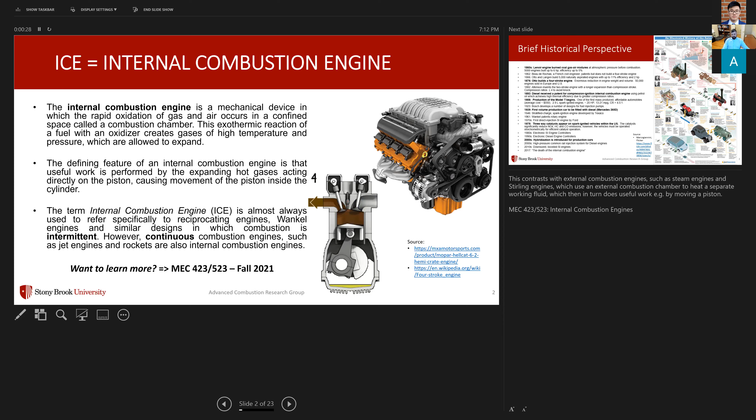But before we banish it, just like we did with the dinosaurs, let's take a little travel down memory lane and look at a brief historical perspective of the internal combustion engine.

First engines came around 1860 or so. In the 60s, Lenoir developed an engine that burned coal gas-air mixtures - couldn't be any dirtier than that. But it was one of the first running engines. It displaced horse-drawn carriages. Thankfully, only about 5,000 of these engines were built. To give you an idea, these were about 6 horsepower and had a thermal efficiency of like 5%.

Contextually speaking, that 5% thermal efficiency number has gone an order of magnitude higher, and we're sitting at probably around 50% efficiency in the internal combustion engine itself.

A little after the 60s, in 1876, Otto builds the first 4-stroke engine. That's the animation you saw on the previous slide. It's the type of engine that is in most vehicles today, if not all. So a big revelation change there.

Then in 1893, Rudolf Diesel received his patent on the compression ignition internal combustion engine, which was a different variant of Sir Otto's engine. The Otto engine becomes essentially what burns gasoline today and is spark ignited, and Rudolf Diesel's engine becomes essentially what we know today as a compression ignition or diesel engine.

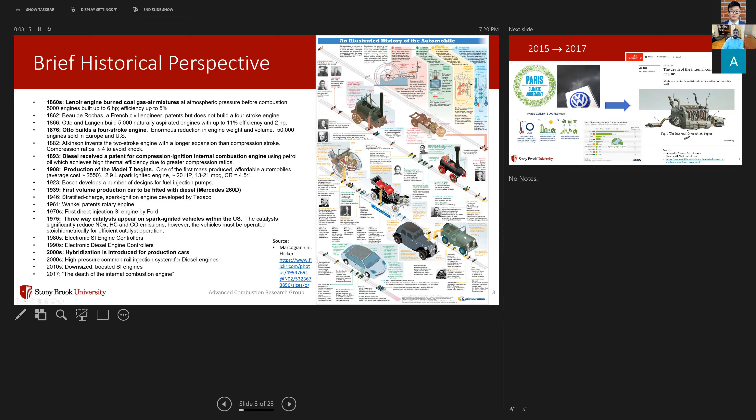Then in 2017, a very salacious article comes out by The Economist titled 'The Death of the Internal Combustion Engine.' So how did we get here? How did we go from the 1860s, when the first engine came about, and even 1975, when we had our wake-up call that smog existed, pushing to have better and better fuel economy, to the point that The Economist is writing an article about the death of the internal combustion engine? How bad of a job did we do as internal combustion engineers at the end of the day? That's how I view this problem.

There are a few contributing factors. You might have heard of Dieselgate, which happened in 2015. Volkswagen, which sells nearly the most vehicles in the world as a company, actively skirted emissions regulations to sell a diesel vehicle that got better fuel economy than the rest, was cheaper, and didn't require maintenance. So you'd walk into a dealer and your choice was either, say, an Audi A4 or a BMW 3 Series, the two competing sedans in that category, both of European descent. The BMW variant was more expensive—a few thousand dollars more—because it had to cover the cost of diesel emission fluid, which is urea.

And so one of the after treatment devices needs this. It also required you, just like windshield washer fluid, to fill this diesel emission fluid every so many thousands of miles, right? Quite an inconvenience for a driver. And on top of all that, you got worse fuel economy than the Audi variant. And the BMW was even heavier, just the boot for the whole thing. And of course, slower.

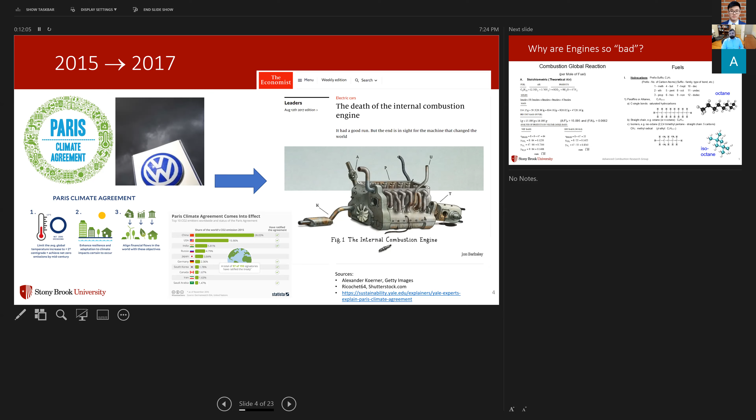Okay, so why are internal combustion engines so bad? Internal combustion engines, I'm going to take you back to your high school.

All right. So why are engines so bad, quote unquote? Let's go back to our high school chemistry, right? And if you have done stoichiometry, which everyone has, balanced one of these reactions, usually we have a fuel plus an air, right? And we have a reaction that proceeds in one direction. We make products of combustion.

And if you have the appropriate amount of air, made up of, this is simulated air, of oxygen and nitrogen in the proper proportions, you see that the fuel, a hydrocarbon fuel, exothermically reacts with air and creates CO2 as a product, water, and nitrogen. The nitrogen is not so bad, because there's a whole lot of nitrogen in the air. The water, again, that's also not very bad, but the CO2 is really what's causing the problem that the Paris Climate Agreement is trying to address.

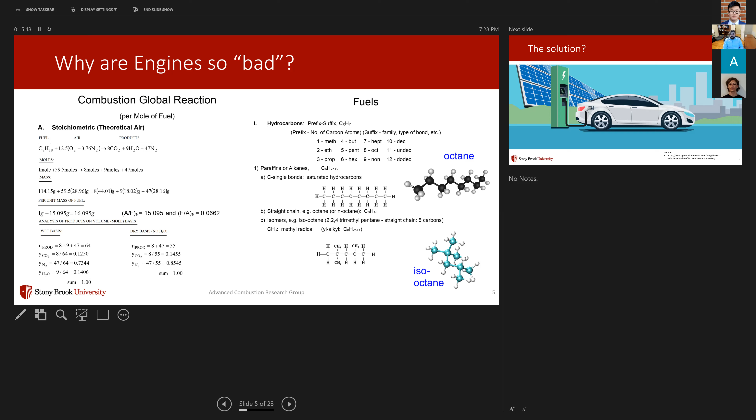But what have we been told that the solution is? The solution is an EV, an electric vehicle. And why is it an electric vehicle? Because it doesn't use carbon. It doesn't use hydrocarbons. It doesn't use fossil fuels, right? It uses electricity to power itself. And you store that electricity in a battery, and then you can propel the vehicle.

Okay, there's the simple issue of range anxiety, right? We've all dealt with that with our phones. And eventually phones got good enough that you could charge them for a day, and that's it, right? If I can make it a whole day with my smartphone, that's all that I really need. If you give me a day and a half of battery life, I'll be honest with you, I don't really care for it, because I still have to plug it in the middle of the next day, right? So my charging schedule has basically become every day.

So what you have to start thinking about is, even when we played with our remote control cars and they were electric powered, you basically either bought a second battery or you went and did something else at the same time. So for me, the solution of the electric vehicle, is range anxiety the issue? No, it's not. The issue with the electric vehicle today, as we know it, is where this electricity comes from, okay? And if that electricity can be 100% renewably generated, then yes, absolutely, the answer is the electric vehicle, okay?

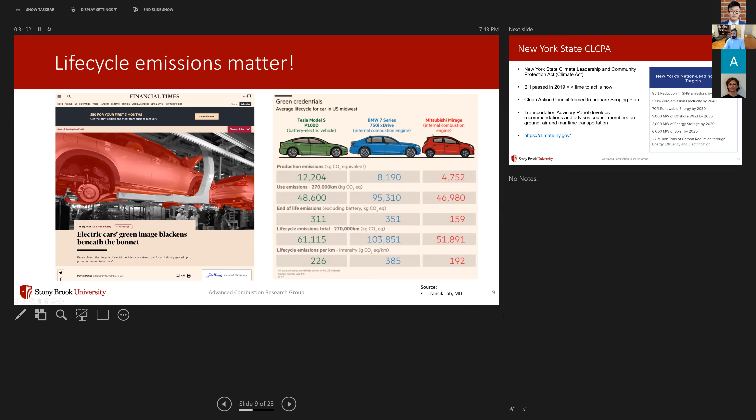So how can we fix this? Okay, how can we fix this problem a little bit with electric vehicles and the fact that the use phase is not near zero, right? And it's contributing. Because if we can get this number down to zero, then it really does become the clear winner. And we can do that by sensible legislation.

Right here in our home state, the Climate Leadership and Community Protection Act set these targets in 2019. We're going to have 85% reduction in greenhouse gas emissions by 2050. So these are 85%.

We're going to have 100% zero emission electricity by 2040. So they're starting to ramp up production of offshore wind like crazy. We're talking about 70% renewable energy by the end of this decade. That's what we need to make electric vehicles penetrate and be essentially clean, not zero emission vehicles. How are we going to do that? 9,000 megawatts of offshore wind, 3,000 megawatts of energy storage, and 6,000 megawatts of solar by 2035, 2030, and 2025 respectively. How are we doing this?

Essentially, the Clean Action Council was formed to prepare a scoping plan, and the Transportation Advisory Panel is one of the many panels that advises the Clean Action Council. We're developing recommendations on ground, air, and maritime transportation on how we can achieve an 85% greenhouse gas emissions reduction. And believe it or not, they appointed me because they know the solution is not all electric, and there's going to be this interim where we're not quite there yet.

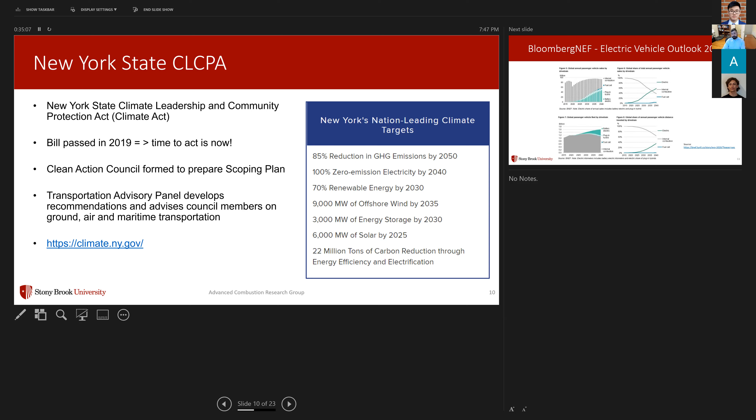Okay, but let's work on fixing the electric grid, getting these 85% reductions, net zero, 85% reduction in greenhouse gas emissions. But do we still need internal combustion engines? I like to look at very reasonable data. On the New York Clean Action Council, we ran through all the numbers, and we weren't going to make this 85% reduction. By 2030, the state wanted 50% of new vehicle sales to be all electric. That number has now been improved from 50% to 100% all electric. Let's see what that does to the number of internal combustion vehicles out there.

So there are 4 figures here. The top one is the global annual passenger vehicle sales by drivetrain. These are reasonable numbers by Bloomberg. In New York State, we're picking numbers to try to meet targets. 50% didn't work, now we're at 100% of new light duty vehicle sales by 2030 — I think they're saying 2030 now. These numbers are in flux, but that doesn't really matter. Let's look at real numbers aggregated not by where we want to be, but what's probably achievable from the industry.

A number like 40% of new vehicle sales being all battery electric would be excellent if we can achieve that. That would far exceed the fact that only about 10% of vehicles are hybrids today. If all electric vehicles could enjoy the success the Toyota Prius has had, which has been phenomenal in vehicle sales, we're talking about over 20 years to get 10% market share. We're saying it's got to be 4 times that from the year 2020. If we do that, our internal combustion engine powered vehicles will go from just under 100% today, plummeting down to 40%, and our electric vehicles will go up to 60%.

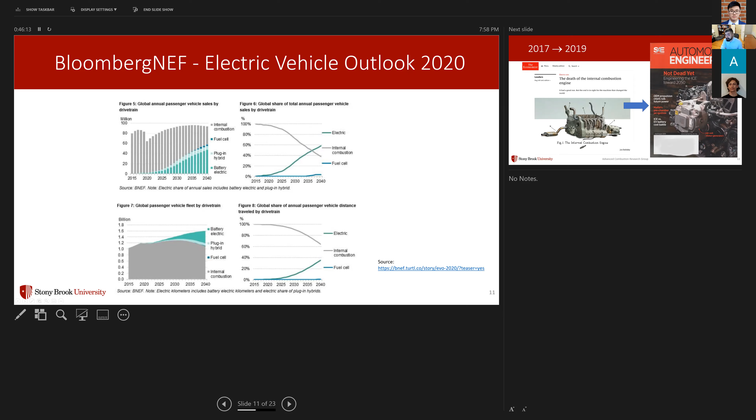If I start displacing the gasoline in that fuel pump, you might have some adverse effects, but if I can put a biofuel in there and you can still use your vehicle, there's not going to be any upset over whether we're decreasing our carbon footprint of transportation. It's only when I start infringing on your rights or abilities to do things, or telling you what you have to buy, that it becomes a contentious argument. But there's a lot of work that needs to be done for internal combustion engines, because we have to keep making them more efficient if we know they're going to be around.

So in 2017, we get out of this valley of death, quote unquote, and we get to 2019. We're seeing now articles in 2019, 2020, 2021 that it's not dead yet. It's still ticking along. Numbers are still kind of in favor of internal combustion engines having to exist. And if you look at the federal funding scene in the years 2016, 17, 18 - because there's a little memory effect - the government basically said the priorities were electric vehicles.

Like all the funding basically went out there. It was for the first time in my life that I saw the annual research expenditures of the Department of Energy go from being near 120 million, which at some point was all for internal combustion engines. Fine, non-issue, okay. That number is now roughly about half that. But there was a year in there in 2018, 2019, right, because that money was appropriated a year before, that we went down to about 10 million dollars of federal research money for internal combustion engines for Department of Energy. I mean, that's astounding, right?

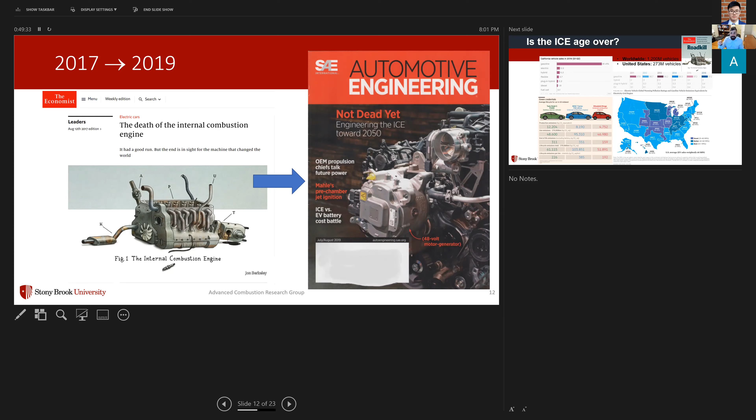But we got to stop feeding them fossil fuels. Whoever is a proponent of fossil fuels, I think you've probably missed the boat here. It's time to move on from them. It is really causing an issue. But the internal combustion engine itself is a very versatile, very flexible device.

So if you look at all the facts, I really think the answer is not yet. And someone's got to do this tough work, okay? And I can't do it alone. So I'm hoping to inspire you.

And I also have a wonderful team of graduate students—3 experimentalists, 3 computationalists, including a master's thesis student that's a Fulbright scholar, and even an undergrad doing a research project with me, an undergraduate research study. And they're really the ones that are on the forefront, pushing the boundaries to help us make a better story of why internal combustion engines have a future and how we can keep improving them. So they're really the real heroes here that have stepped forward. They understand that this is a tall challenge and it's not one that anyone wants to really fight, but we're qualified and we're ambitious to make that change.

We have a laboratory at the Advanced Energy Research Center, and we also have space at the Institute for Advanced Computational Science. We're lucky to have both of these very modern facilities. Both of these are less than 10 years old. I mean, it's beautiful to work in each one of these.

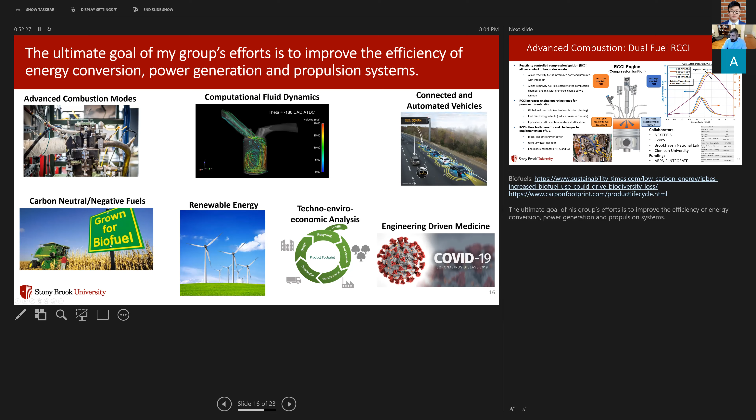We deal with flows, with heat transfer, with combustion, with thermodynamics. And there's nothing preventing us from taking our computational knowledge and even applying it to evaluate wind turbines. Pet project of mine is connected automated vehicles. I'll just show you a couple small slides of my research.

This is something that Chognan Ren, Ruinan Yang, and Rodrigo Risto-Hadlich have worked significantly on: this concept of dual fuel combustion. Specifically, imagine this: what fuel are we using? We are using the emissions that come out of a hydrogen and natural gas fired fuel cell. Think about that—there is calorific value left in the emissions of a fuel cell.

I thought the fuel cell was so clean, but if you run it on natural gas with a solid oxide fuel cell, which seems to be the flavor of the week these days, you can put an internal combustion engine after it. It's really hard to burn that fuel because it doesn't have a lot of calorific value, but it's got some content in it. We've essentially developed a way to actually burn it in the laboratory.

The students have been great. This work was funded for 2 years from one of DOE's arms, ARPA-E, under the Integrate program. We showed, essentially, we effectively demonstrated that we can have 70+% electricity, or fuel to electricity, conversion using this hybrid solid oxide internal combustion engine system.

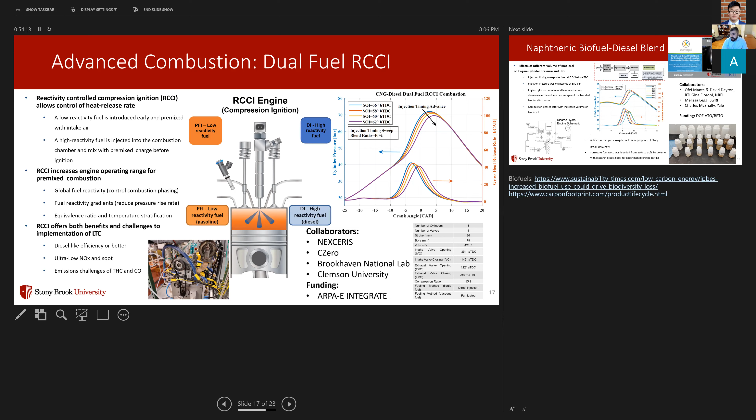This pushes the boundary of natural gas fired electricity power plants, and it certainly is much, much better than coal-fired power plants.

Another project: talking about these biofuels, we're literally making samples. We're making naphthenic biofuel in the laboratory. We're making surrogates of it. We're working with our partners at RTI International—they actually have the 1 ton per day reactor that's converting the biomass into liquid diesel fuel. We're characterizing it from the chemistry viewpoint, and we're looking at the combustion and emissions performance side in our engine here at Stony Brook.

If this process works, we can essentially make diesel fuel equivalent from biomass, and it's just a matter of scaling it up. Fingers crossed that we meet this—there's an ASTM specification D975 this summer. But if it's good to go, then all the emissions data and all the work we've done in order to tailor the formulation of this fuel has really paid off and can provide a solution.

This work was funded by the Department of Energy Vehicle Technologies Office and the Bioenergy Technologies Office. Again, the 3 experimentalists are working on this: Chognan Ren, Ruinan Yang, and Rodrigo Risto-Hadlich. They're really on the forefront, mixing the fuels and running the experiments and taking the measurements in order to get us to a cleaner future.

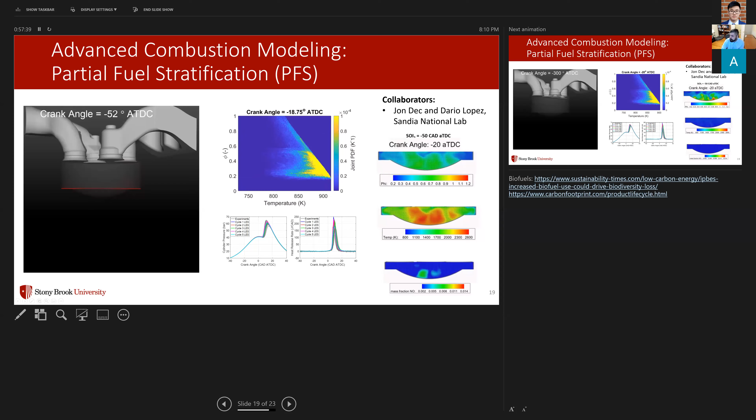This seems as if it's easy to get, but Gaurav sits there and pecks, probably for one of these runs to complete—just literally to complete on the cluster here at Stony Brook—takes us maybe close to 2 or 3 weeks of runtime. The analysis is a whole separate animal, and so is the pre-processing.

So one of my other graduate students, Ioannis Nikiforakis, and this work was led actually by Mahmoud Koraim, again both computationalists, looked at essentially the levelized cost of electricity produced by a wind turbine if we try to improve the performance by adding a conical diffuser in it.

You're basically trying to accelerate the velocity and straighten out the flow in order to capture more air to go over the wind turbine blades. We look at both the wake field and specifically whether we can increase the velocity. The far field velocity is probably around 8 meters per second, but inside the diffuser we've actually been able to accelerate it to around 11 or 12 meters per second. So we're able to essentially evaluate that.

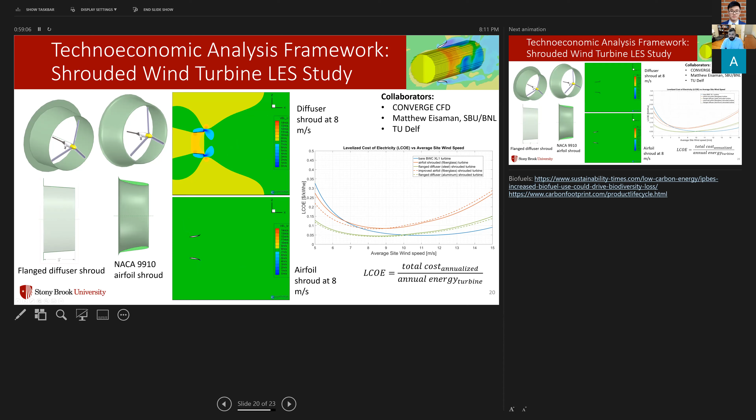We don't just do a simple evaluation, we also do a life cycle assessment and look at different shapes. Is it cheaper to make essentially a very simple geometry that you can just piece together, maybe out of two pieces of sheet metal, or should we do one of these wing optimizations and essentially get the highest flow field possible?

Even us mechanical engineers get calls to action. This was back in COVID, in March or April, right when COVID had basically hit. Over the course of 10 days, Professor Jon Longtin, who led our team, and Professor John Brittelli from the School of Health Technology and Management, we developed essentially a ventilator in 10 days, which you see here on the left-hand side, right during the peak.

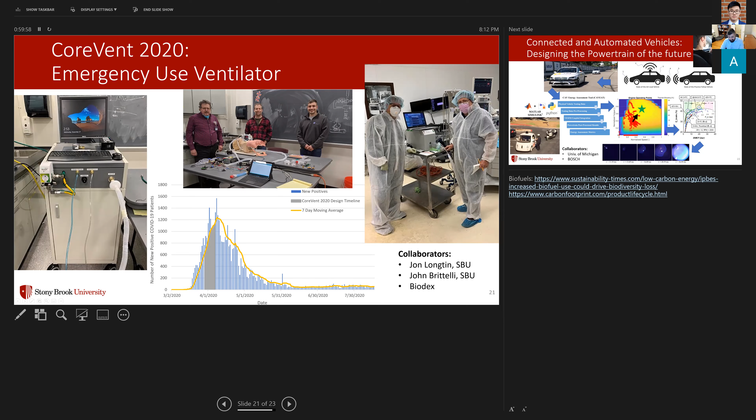We were basically on standby in order to start essentially putting it on a human. We even did animal tests to ensure that it was safe to operate. We were very lucky that the numbers literally started turning down and there were enough ventilators at that time, but very, very scary times.

And then this is my personal passion project. As connectivity and automation starts essentially moving forward into transportation, it gives us another level of essentially reducing greenhouse gas emissions by changing the energy demand profile. This changes where we can operate.

Instead of needing to have these wide ranges of operating space for a driver like myself who's technically unpredictable, you can have a computer that always accelerates at a fast but smooth pace. You can have essentially very different operating points. So once we know what that new duty cycle looks like, that means we could redesign the powertrain.

Especially as we look at hybrids, there's a lot of future there. And then we can go back to our advanced combustion modes, our low temperature combustion, go back to our fundamentals and design the cleanest combustion modes using the existing hardware that we have today. It's just a matter of how we prepare the fuel, when we inject it, how we ignite it. We have so much more control now, so many more advanced computational tools, experimental techniques, and nice sensors and equipment to tell us what we're doing, so I think the future is really, really bright.

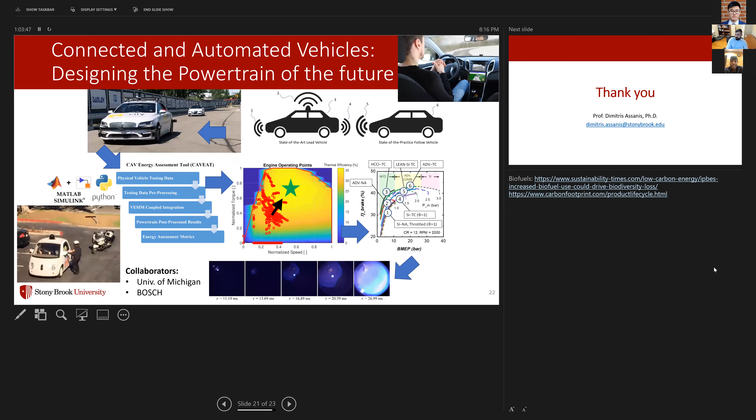This process relies heavily on a catalyst. So if you can improve the chemistry in that catalyst, you can make it more efficient, you can do it at lower temperatures, and this process would need less energy. Where do we get that energy? The goal here is to essentially have it be generated renewably in the future, right? But we won't be using the electricity itself for transportation in all aspects, right?

You can't have a semi truck going across the United States, right? You can't. The amount of batteries that you need will decrease the volume so significantly that you either have to add more cargo space, or the cost to deliver a cubic foot of cargo will double if you cut it in half, because it's just the name of the game, right? There's no good way to do that.

So in terms of fuels, I think catalysts can definitely help there. There could be some CO2 capture technologies. The other thing is, even for present internal combustion engines, getting a three-way catalyst or even oxidation catalyst. The three-way catalyst works very well for a spark ignition engine that operates stoichiometrically.

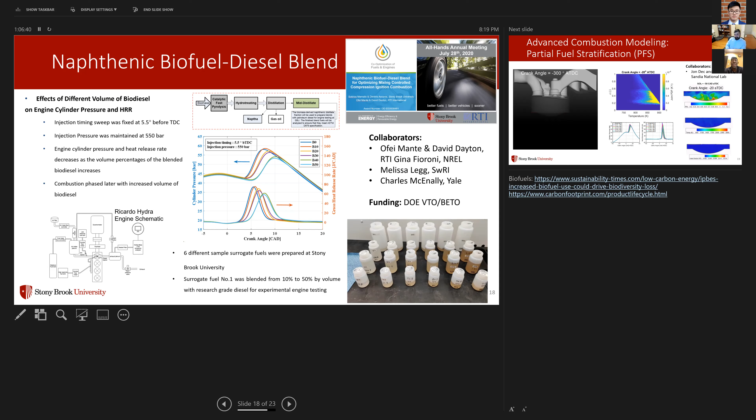Amen. And from hearing your lecture, which was so interesting, it seems like electric might be the transition that we need to actually bring the internal combustion engine to a higher standard. If you ask me, we should hybridize everything. We should not have pure ICs, and they definitely should not be running on fossil fuel.

That's a given. You have to understand, whenever we push the boundaries on fuel efficiency, we get tighter and tighter emissions regulations. These are all good things because they basically cause work for me and my group. So I like the challenge, right? That's why I do this. But you have to understand, we cannot remain stagnant on gasoline at 80, 90%. Mark my words, we cannot do that, okay?

And do you see all these options? All of them need to be executed, and all of them need to be advanced as fast as we possibly can. What we should not be doing is picking winners and losers. We should not be saying electric only and forget the fuel cell, okay? We should not say, let's do all fuel cell and forget diesels that can run on biofuel, right?

You've got to put this puzzle together, because we all need to run together in the same direction, because I'm worried that we basically will not get to the finish line in time. So there is no, am I taking lane 1, lane 2, or lane 3? No. Let's all sprint forward. Let's all be friends, okay?

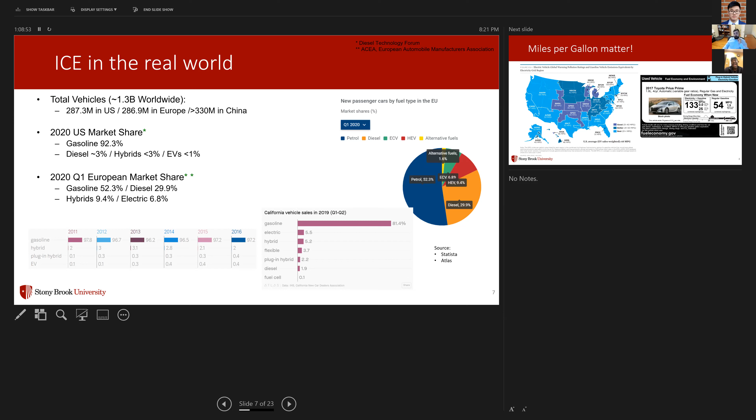And make sure that we try to have a cleaner future for our kids tomorrow. Amen. So you don't think that focusing on electric, because that technology is already right here, ready to rock and roll for a short period of time, isn't, because it almost seems like if we do push electric forward really quick, it will drop the CO2 emissions by a lot until we get the hybrids and some of these alternative fuels, and even building synthetic fuels that don't even have carbons, so we can move away from the hydrocarbons.

So look, I think it's something like this, okay? We've got to look at this map. Wherever that map has very high numbers, if you want electric vehicles, the first stop is you've got to invest in renewable energy. Go put up solar panels and everything. Don't give credits to get electric vehicles out on the road. Give credits to clean up the grid. The minute you have a clean grid, you can sell an electric vehicle and you'll have clean CO2.

Otherwise, we go back to this conundrum: we're in Michigan, you have a fancy Tesla next to you that has a zero emissions plate, okay? But its equivalent miles per gallon, because it's getting fueled from a coal-fired power plant, is 38 miles per gallon. So I ask you, not today's technology of 2022 model year vehicles that are out there. I'm telling you that a 5-year-old vehicle is able to attain 54 miles per gallon on gasoline and 133 in hybridized state with existing technology. Why would we not promote that vehicle if what we're asking is to clean?